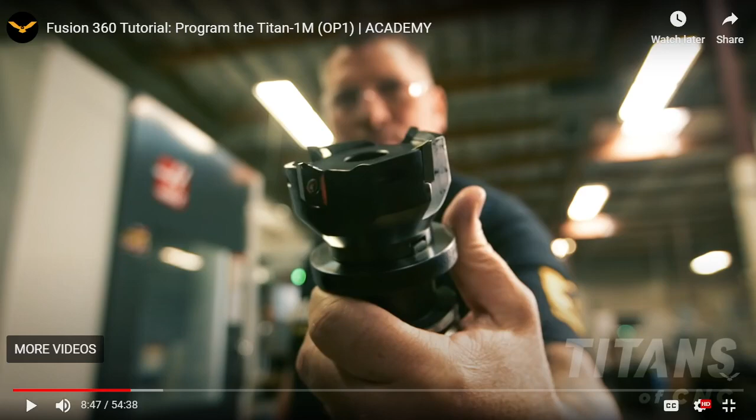Okay, so the next step after we get the stock in there is to start to set up the tools. You may notice he points out that he's using a 3-inch cutter. He's going to face the part, which means just take a layer off the face of it.

And then he points to the tool library, and he talks about that. Now, that tool library is not going to be in yours until you download it and put it in there. So let me show you how to do that.

So actually on this website, right next to the video, you'll see Fusion360 tool library. You click on that and you'll notice it downloads. I already did it a couple times. Basically that goes to my downloads folder, so it's in there.

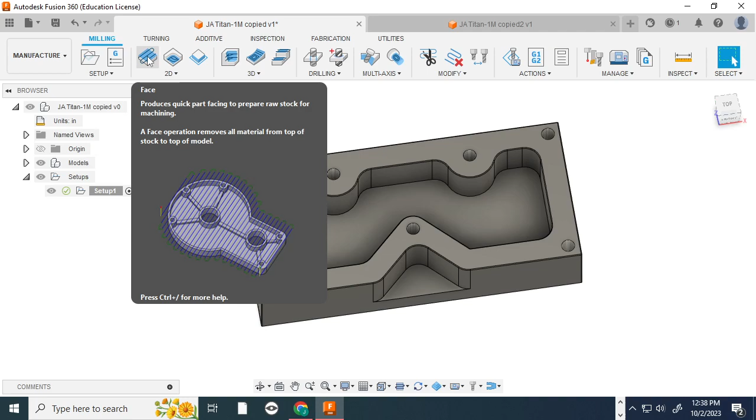And how do we get that into Fusion? Let's go into Fusion. He does it, first he goes into the face tool, and then he goes to select the tool, which is here. And this is where we hit our roadblock. We don't have, well, I do now. Let me delete that. So you may not have a thing that says cloud. Yours might just say local. There might be nothing under it.

Yours doesn't have to. Basically, you just right click on whatever folder you want to put into. You can put it anywhere really. I'm going to do it on cloud but you could do it on local. You just right click and import libraries.

And I have downloaded it a bunch of times, but there's a .tools file. It's in my downloads. If you don't realize, you can just get it there. And after it loads, boom, we got all the tools that he just used.

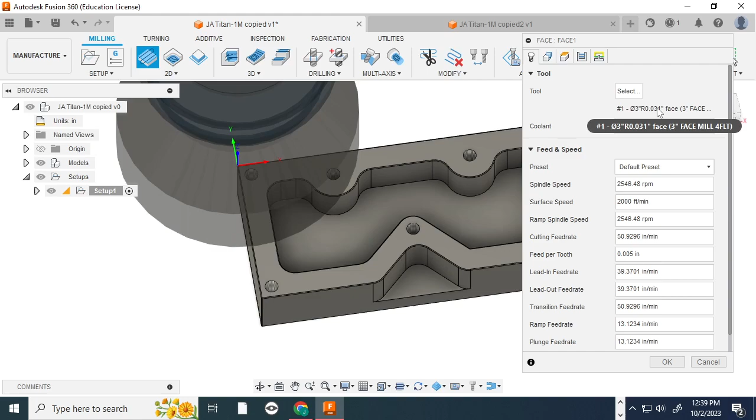And so now we can select the diameter 3 face mill. And we can see it selects here. And let's see what he wants to do next. Oh, check that out. It shows it.

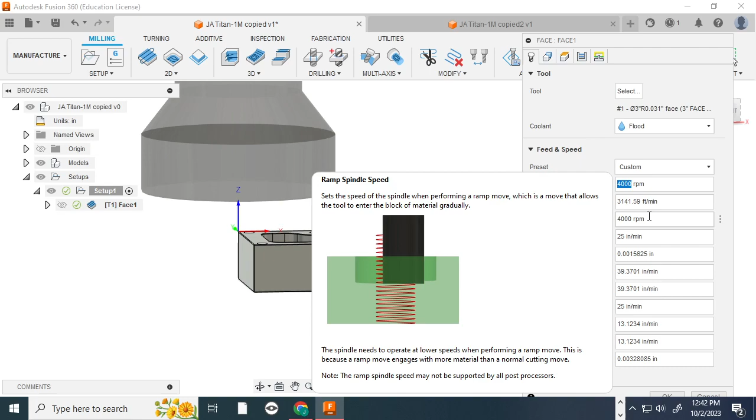Okay, so the next thing that's in there, he changed his spindle speed. He had it, yours might be different, but he put it on 4,000, so I'm doing the same thing. The cutting feed rate, he slowed down to 25. Lead in, again, that's 25.

And on our machine, we have a little machine, we may have to go even slower. Inches per minute means how fast it's cutting side to side, how many inches per minute. So it'll go 25 inches in 1 minute. So what does that mean? We'll see how well this cuts.

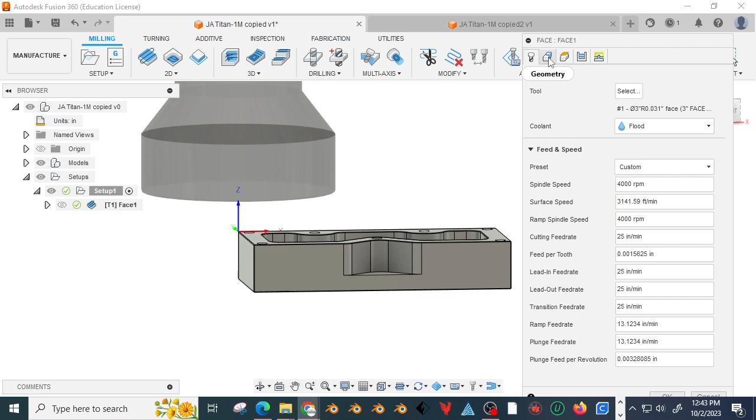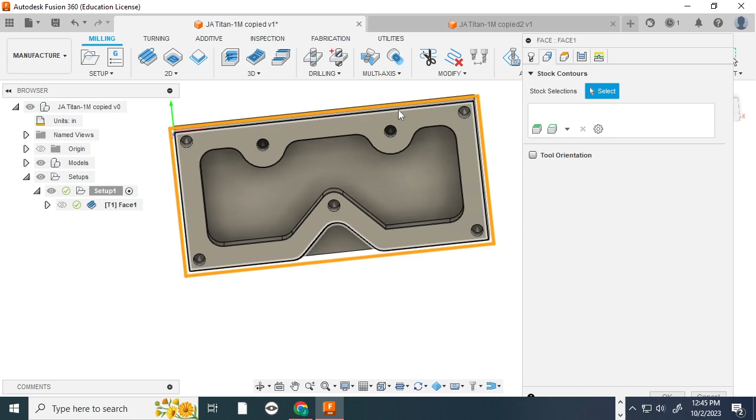Okay, then we could go into selecting our geometry. So when you go to geometry, it already selects the stock, right? So you want to make sure that if you look at it from the top, your yellow or orange line is going to be past the outside of your part, because it's going to be based on your stock, which is your original piece of material.

And it is. So we're going to go on to heights. And if you look at these, and it tells you what they are, right? You got the bottom, the clearance. Oh, at the top here says retract and feed.

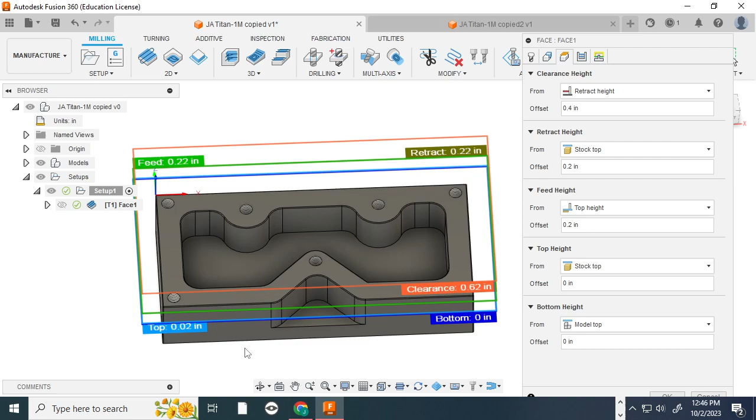So let's say after it cuts, right? When it does cut, it's based on the top, I believe. And then when it's done that cutting, it lifts the tool up and goes to the retract position. And in this case, the feed and retract are the same. Basically, it does that so when it's done cutting, it doesn't move to the outside and then break the bit. It has to know to go lift itself, clear itself, and then come back down.

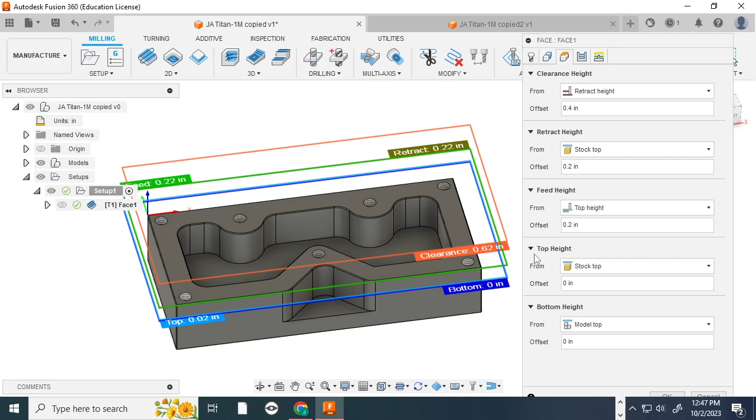So all these kind of work the way that right now they'll work. What the guy says in the tutorial is to make this say model top. So basing it from the model, it's just good practice because after you face it, you'll have basically measurements that you can just measure in real life from that part. All right, so model top, model top, model top, and this is not fitting. Cool.

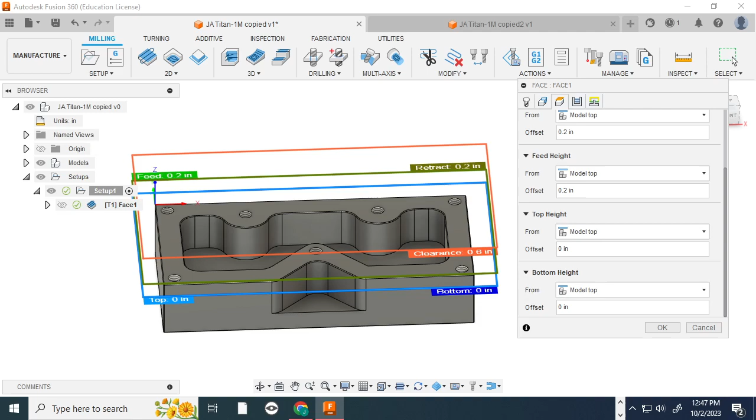Okay, so when I forgot to do this top one, model top, and he has these at 0.4, 0.2, 0.1, and you can notice after you have, if you put your cursor there, it should give you an explanation. Anyway, these are all good. 0.100.

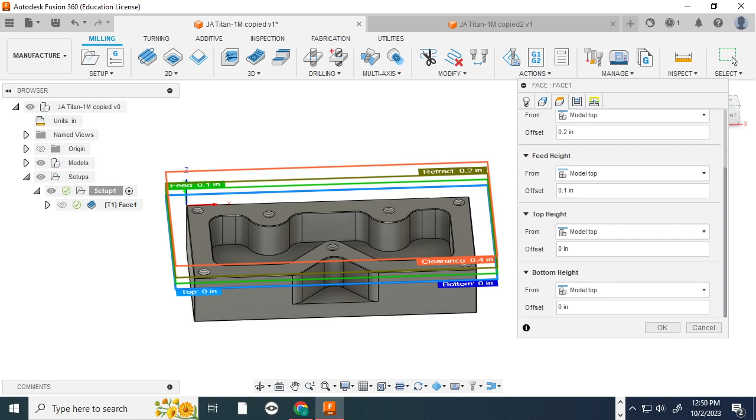Okay, so we got this squared away. This is our heights for passes, everything seemed to be fine. Now, what's going to be important in the future is going to be step over, and that's ultimately how much it cuts in side to side every time, because this isn't going to be a giant part. It's going to be 3 inches, so this would be fine. But just remember that word, step over.

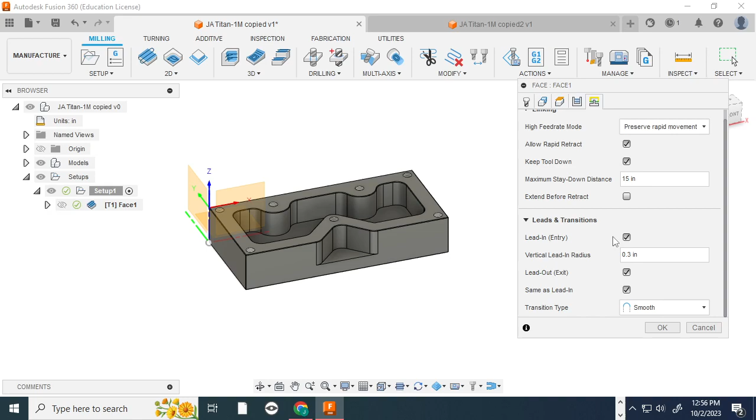And we're going to talk about the lead in and lead out, but everything else is good right now. So I'm going to hit OK. And it shows you with that blue path. So this is your vertical lead in. Then it goes and it cuts. And it comes out here.

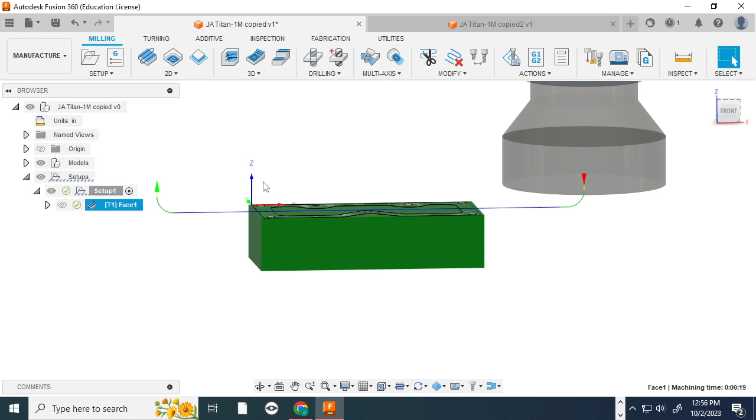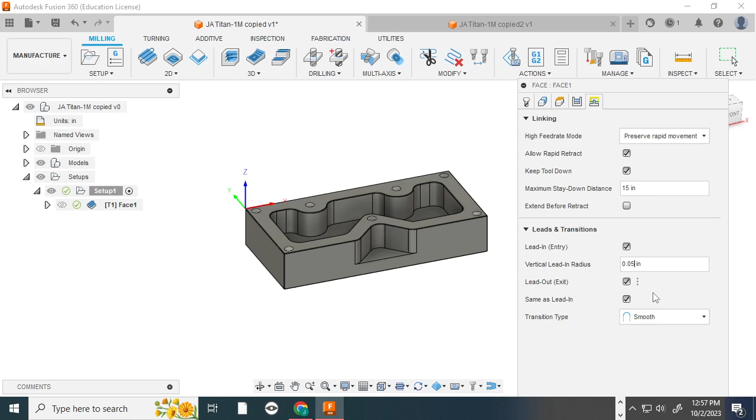In the video, he went back, so just double click on this. He went back to linking, and he made that instead of 0.3, 0.05. You'll see that those curves and the lead-ins of that kind of disappear. All right, so they're still there, but they're just small.

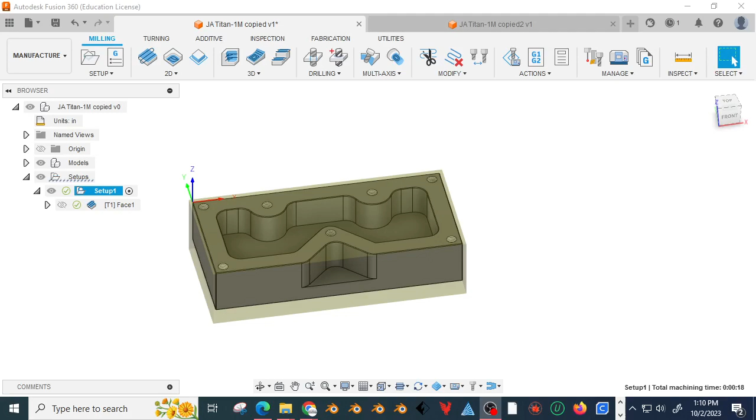Okay, so it's time to do the second part. He's going to use adaptive clearing. It creates a roughing operation that uses a more optimized toolpath that avoids abrupt direction changes. So click on that, and we know we have our library already in here.

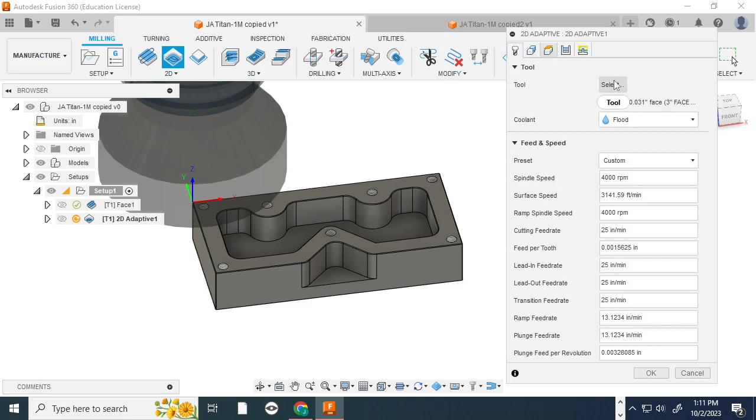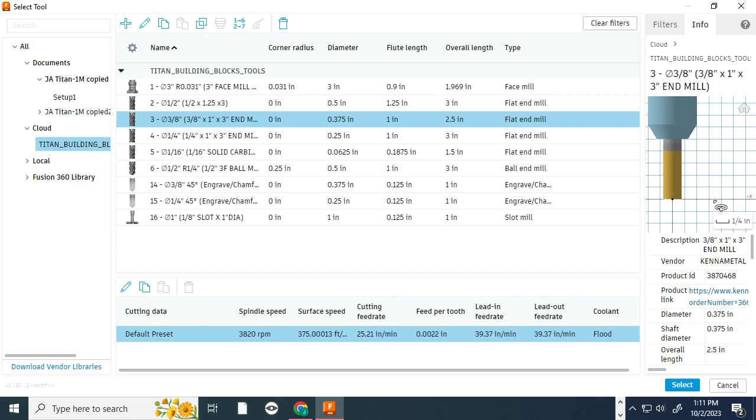You just got to go to Tool, and wherever your Titan building blocks are, and we're looking for the 3/8 end mill. The end mill is flat at the very end of it. You can see it over here, just flat. There are ones here that are round at the bottom. That's not what we're going for. So make sure it's an end mill. Okay, select.

Now, the rest of this is basically slowing this down and figuring out how much is going to be cut where. So it would be nice to look at what he's doing here. He talks about what these do. The feed rate is inches per minute. And for the ramp, that's coming in like a helix or a spiral. He has 15, ours is 13, so it's fine. My numbers are actually pretty close to what we need, so I really didn't touch any of that.

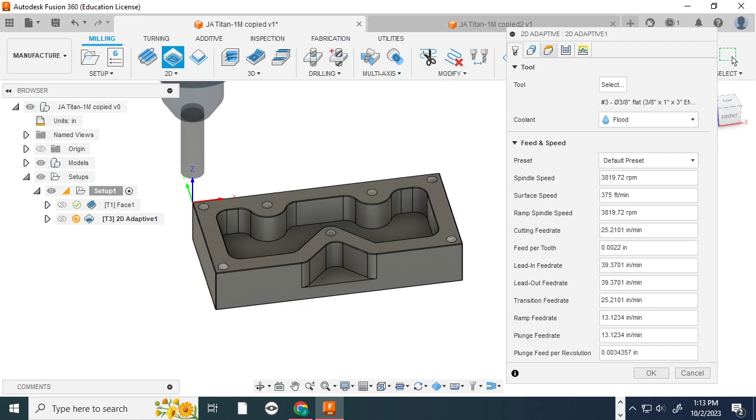Okay, so let's start actually cutting this part. We're going to use adaptive clearing, but make sure that you're using the one from the 3D section, because I tried using the other one by accident and it's not what you need. So you're going to adaptive clearing, 3D section. He spent some time adjusting these and they're pretty much perfect. He has this at 15, but 13 is even better, because if you're not sure, go slower.

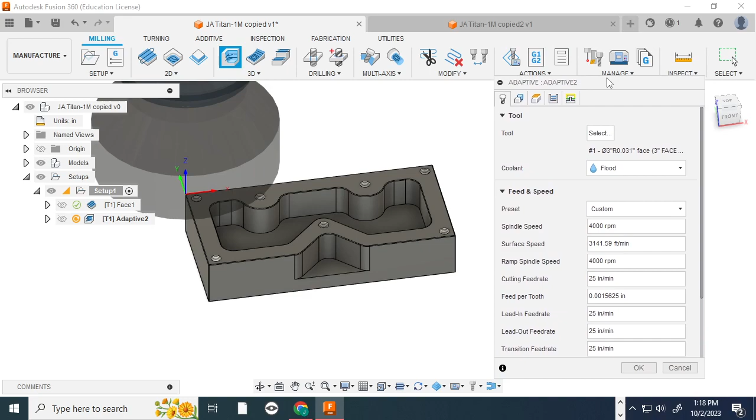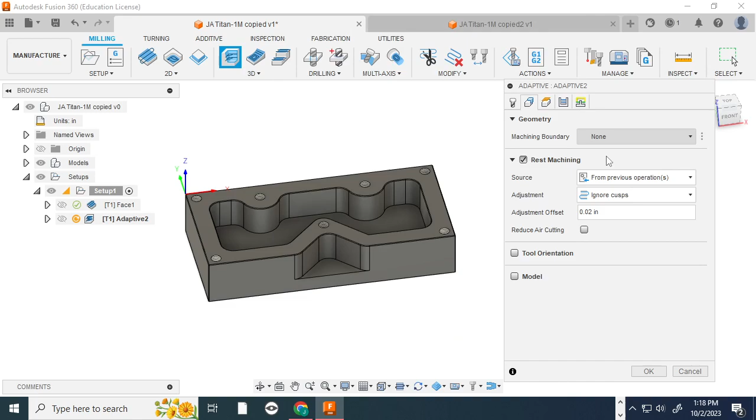All right, so for the geometry, none of this was changed. But just so you know, if you're not sure what something does, if you just hold your mouse on it for a while, it kind of shows it. In this case, you would think you want to select something, but you don't. You just leave that none. Go into heights.

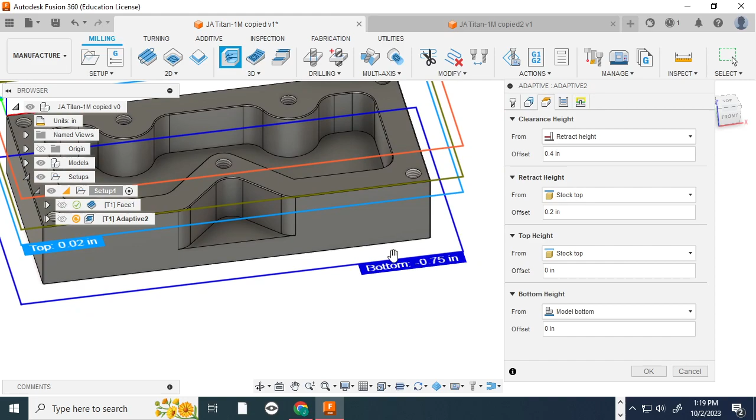Everything is pretty much good. At the bottom, he changed it, or he didn't change it. It was already at model top. All right, so I guess the newer version knows that its bottom is minus 0.75 from the origin, but he was trying to point out that he wants it to be negative 0.01 from the top, so that it cuts a little bit past where the bottom of the part is. So you can either put that as model top negative 0.76, or like I had before, from model bottom, and just make sure it's 0.01 lower.

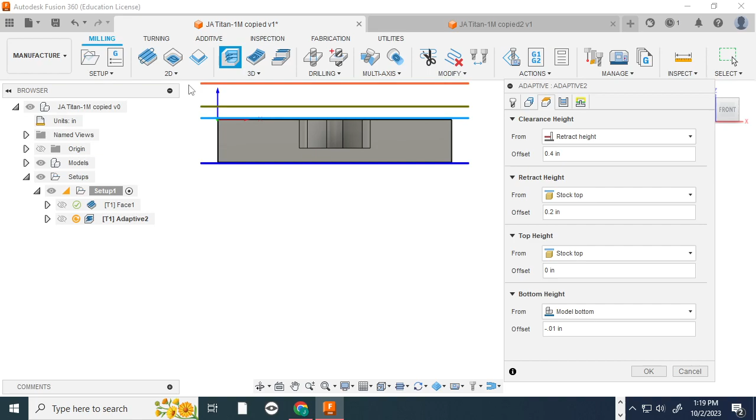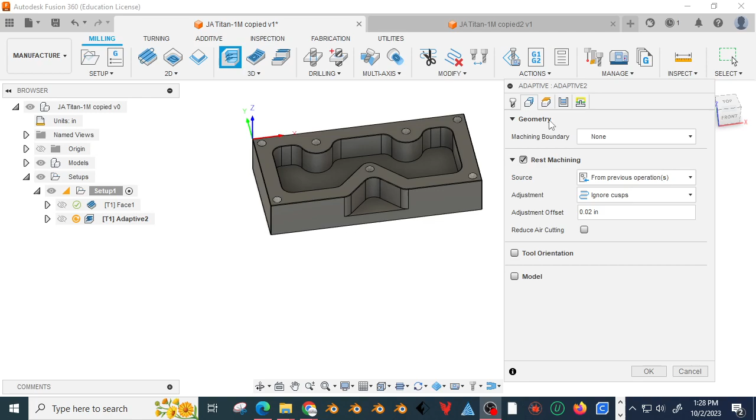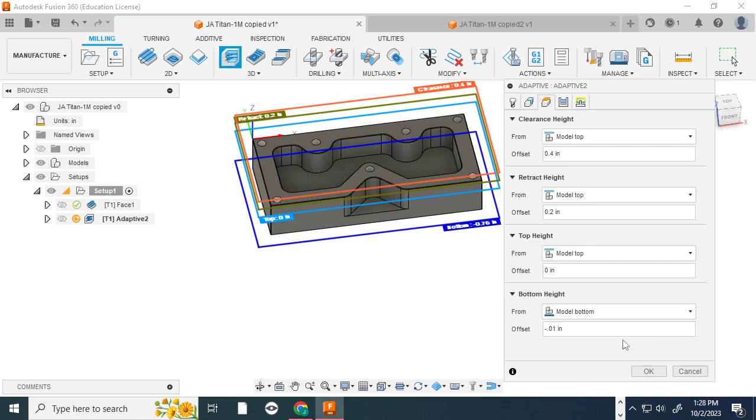Okay, so when we go to the next tab and we're looking at the geometry, it's a lot different than what he has. For instance, we're missing some stuff. Honestly, I think we can just go to the next page without doing any changes on this one. And then we can go to heights, and we're going to make sure it's all model top again, just model top, not stock top. Model top, model top, model top. Let's just see what we're doing here.

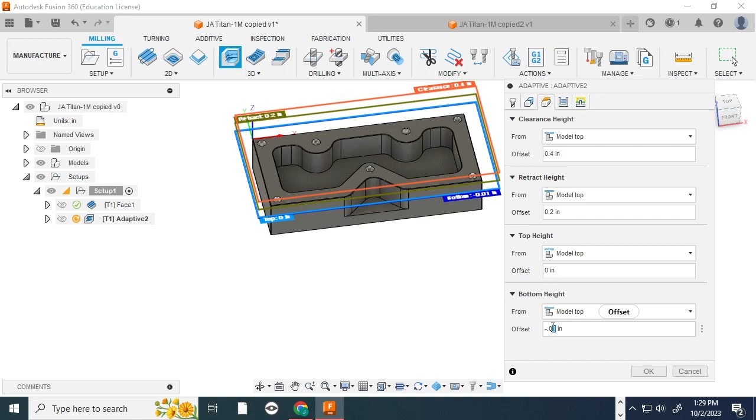For this one, we talked about this before. We could leave it at 0.01 and then model bottom, but let's do what he wants, which is model top. And that was negative 0.76, which goes right below. Let me bring that back up.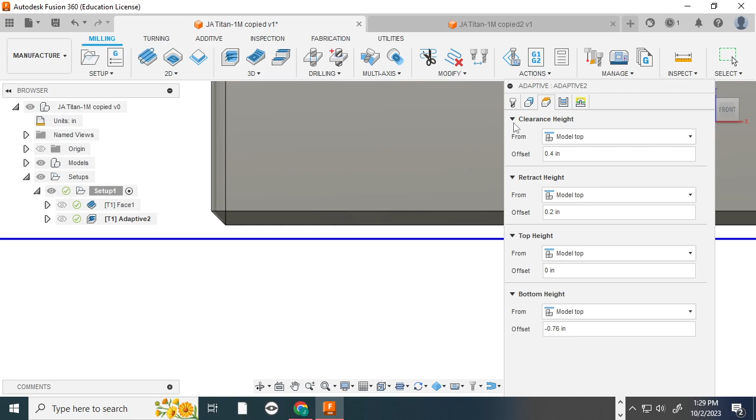So now we can go to the passes. Passes are basically how much it cuts every time—it has to go back and forth a certain amount of times, and how much it cuts into your part every time. You've got step down and step over. Some of this is explained a little differently in this program, and if you put your mouse on it, it should explain what it does.

But the first thing he changes here is, remember, we're using a 3/8 tool, that's 0.375. So if we put 0.1, that's basically like a third of the way—it's cutting a third of the way in. That's the optimal load.

This must have been set up for a bigger tool at first. So he made that 0.05 for the cutting radius. Not a big deal, everything else is good.

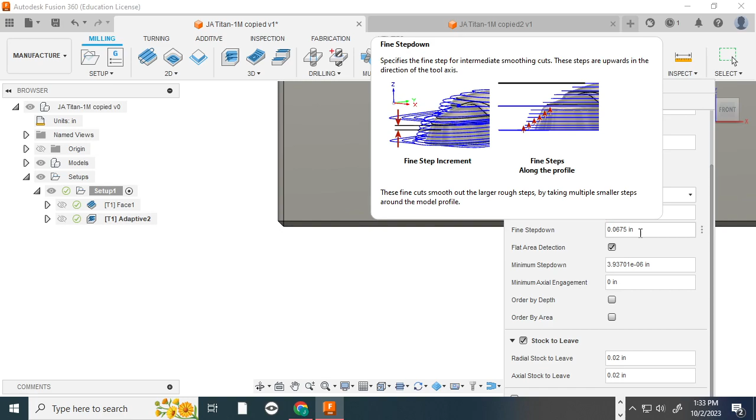Then we get the maximum roughing step down—this is stepping down, how much you would go in the Z direction. It kind of shows it there. He's going to plunge the whole 1/2 inch, so he basically just said this can cut—there's not going to be a pass, it's just going to cut straight down.

That was set to 0.8. It doesn't really matter as long as 0.8 is more than any of the cuts would be. And then there's stock to leave—he's got it at 0.01.

It kind of gives you some explanation if you wanted to see it—you just have to hold your mouse steady there. All right, going to linking.

Step down, stay down distance—this is 1.875. I don't know if it matters so much. The clearance, it's got that.

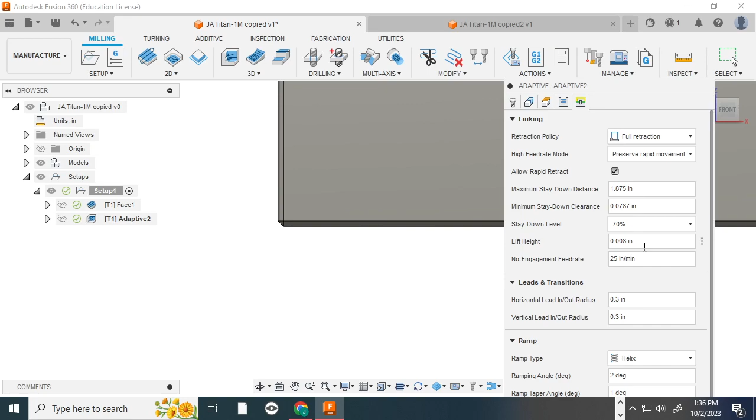0.0787. And then he changed this to 70, and he explains why in the tutorial. I would agree.

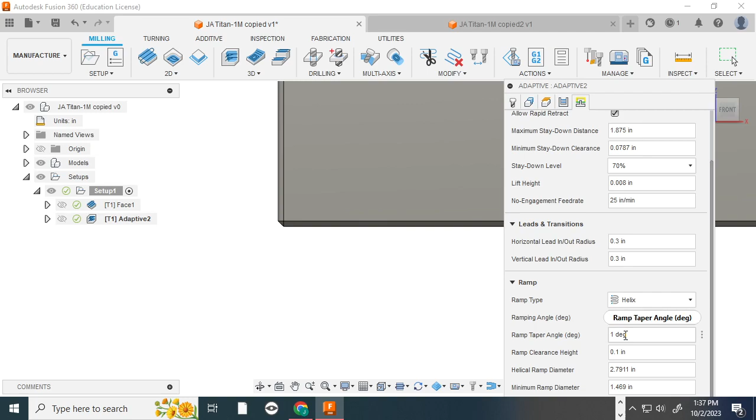It's at 4 degrees, 0 degrees. Ramp clearance height, that's the same.

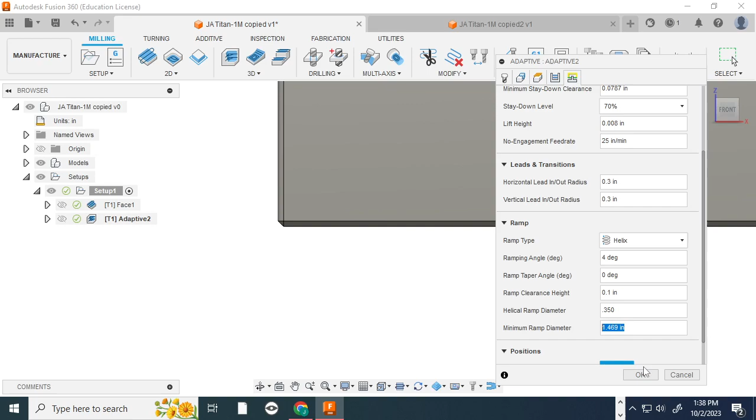Now the ramp diameter node is a pretty important one, because right now it's bigger than the actual tool diameter, which is 0.375. So he makes it 0.35, and minimum would be 0.3. And then we can hit OK.

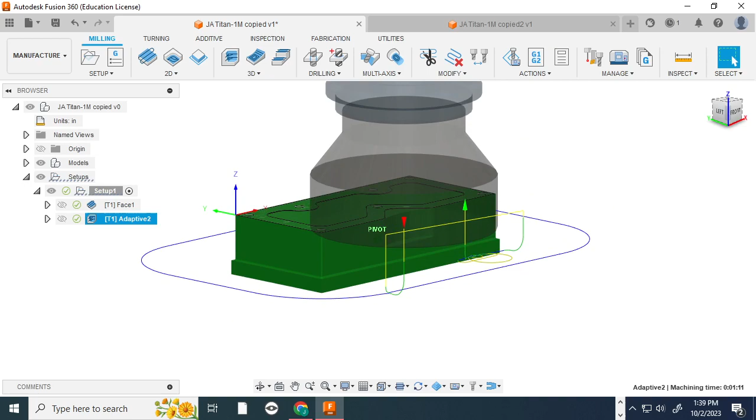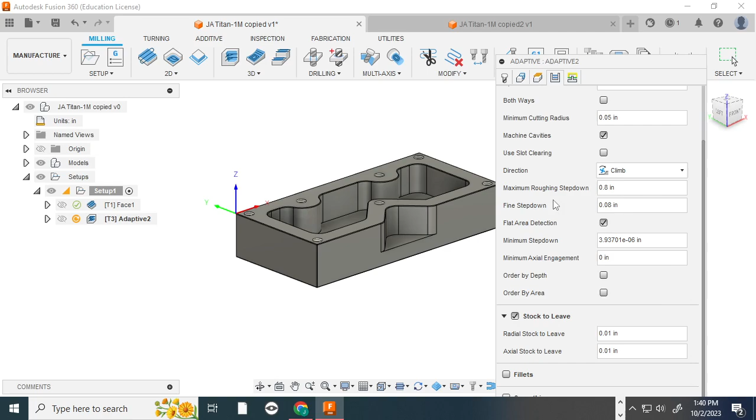It looks like I have the wrong thing somehow. There we go, hope I didn't lose any stuff. 0.76. Step down—yeah, lost a little bit of it. Let me fix that, somehow it still had the wrong part.

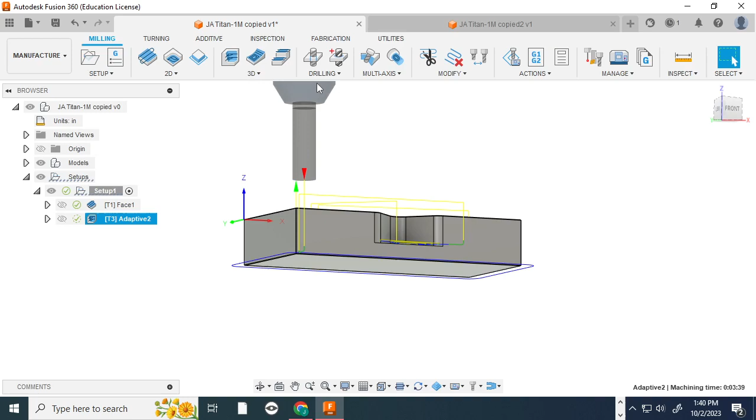All right, I'm going to hit play. And that looks like the right part. Now I changed it—just going to play. Oh, it did generate, okay.

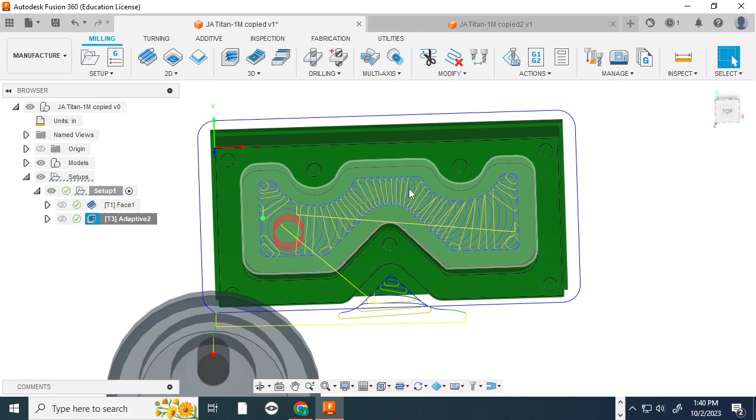So you can see now at the top, instead of doing a zigzag, it comes in and spirals as it cuts—pretty cool. That's the helical aspect we were talking about.

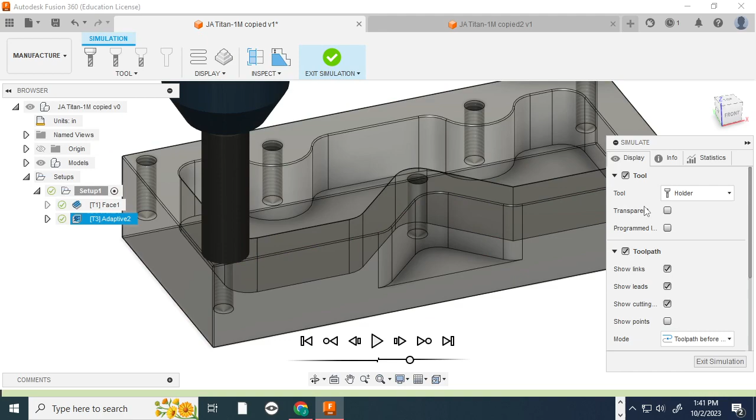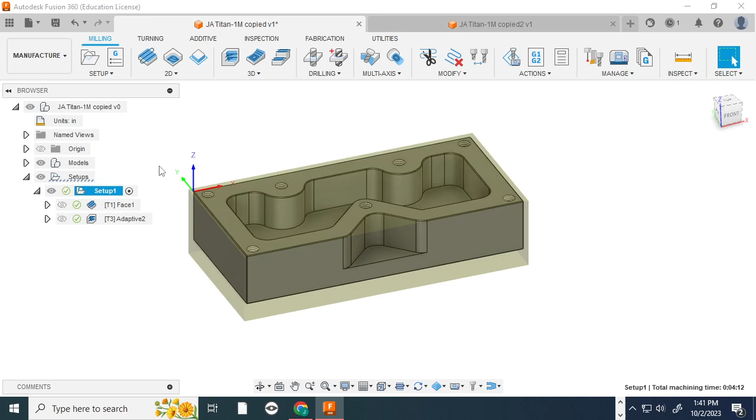Let's look at the simulation. Show the stock—this is green, I don't know if it matters. Simulate. There you go, and I should be able to hit play. You can see it cuts that. If you pause it halfway, you can really get an idea.

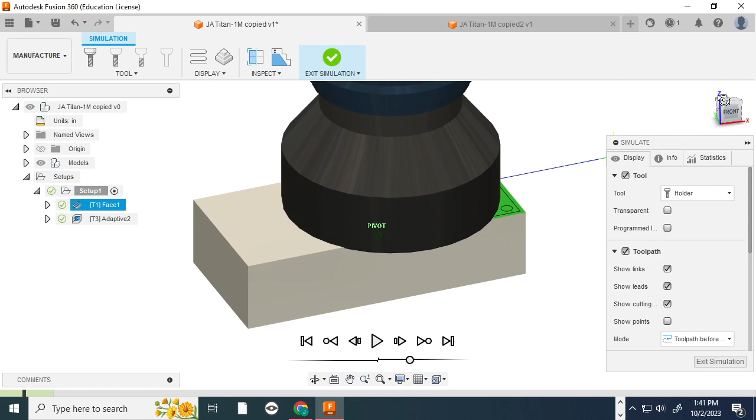So that first one is a face tool, it's taking a little bit. And as you can see, then it gets a new tool and cuts around the edges. Nice—you just want to make sure it doesn't do anything crazy that you didn't expect.

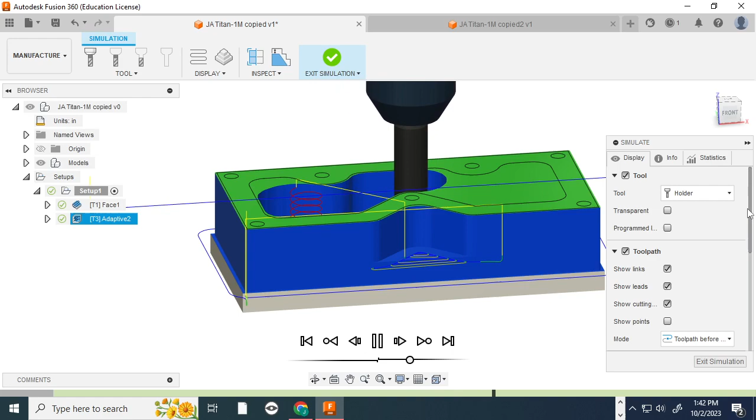It's just cutting a little bit at a time. Notice it leaves stuff over here—it'll probably come back to it. It's doing the roughing anyway, you might still have to do the finish pass. Nice. There you go, oh shoot.

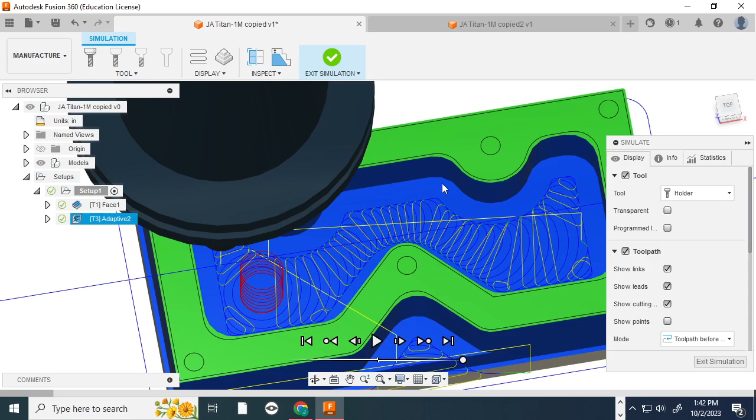So let's look at the end product. Notice there's our part, and it still leaves some—that's what roughing does. It gets most of the stuff out, and then it'll do a nice pass. We're going to do another type of pass next. I'll save that for tomorrow.